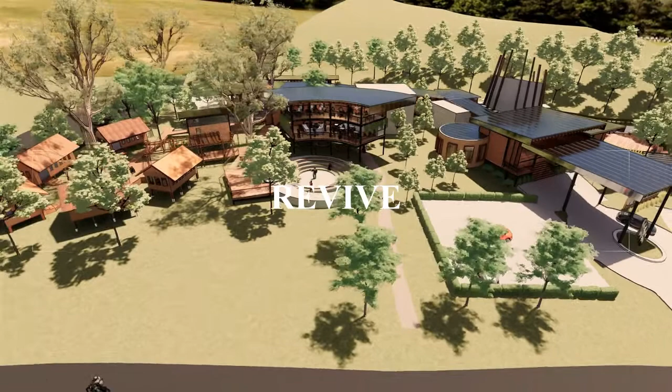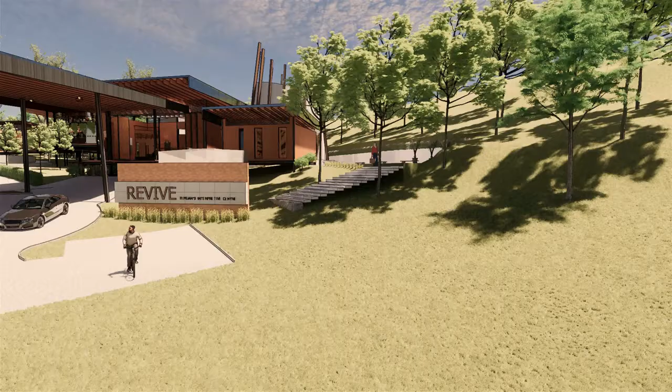I'm going to present my project 2.2, Interpretive Center for the Indigenous Temuan. Revive Temuan Interpretive Center is a center for the Temuan people and the society to visit and learn more about Temuan culture and embrace it.

As I searched about the Temuan people, I came across a Temuan contemporary artist named Shaq Koyok. He painted a lot of paintings that show and portray his own people, the Temuan tribes, expressing his emotion and message through his painting. My concept arose when I saw one of his paintings.

It was seen that a woman's face disappeared due to all the trees being cut down, but appeared when all the trees were still alive.

From his painting, I understand that the Temuan people greatly admire, appreciate, and are close to nature, as they can't live without it. The issue is that nowadays the Temuan people are forced to leave or move from their land and home, and all the trees at their place are cut down by developers, making them feel very frustrated. Temuan people were forced to live in the city or modern lifestyle, which makes them feel stressed, and some of them really miss living in the woods or jungles where they can be close to nature. Modern life is stressful for us city people too.

So in this project, I want to create a place where Temuan people and modern people can heal and revive themselves from the busy world in the city, just admiring the greenery and fresh air at this place. I want the Temuan people to embrace their culture and be proud of their lifestyle, and be happy living with nature.

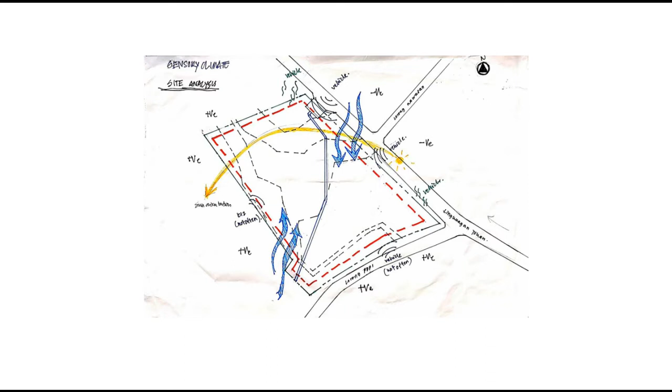This is the site analysis of the site. The positive view is towards the back, which is towards the greenery, and the front is the negative view. But from the road into the site, it's actually a positive view, so that can be used to attract people's attention.

These are some sketches of the site, and these are some pictures taken on the site.

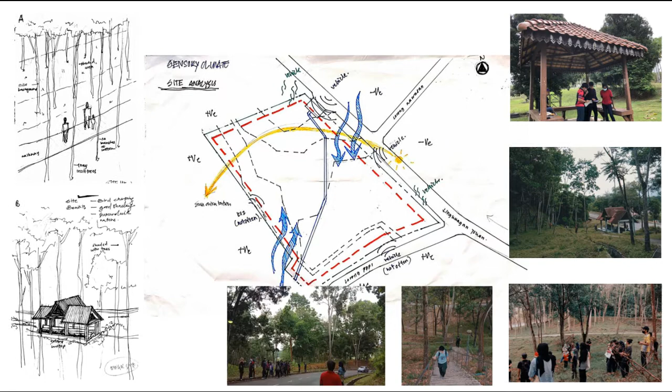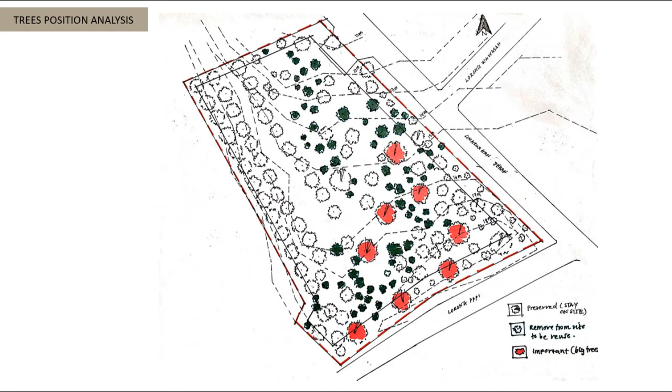For the design development, first I analyze the trees' positions on the site. I think about which trees can be preserved, which tree is important, and which tree I can remove from the site and reuse. There are a lot of important trees, the big trees on the site, colored in red, and some small trees can be considered to remove and reuse, while all the white-colored ones will stay on the site.

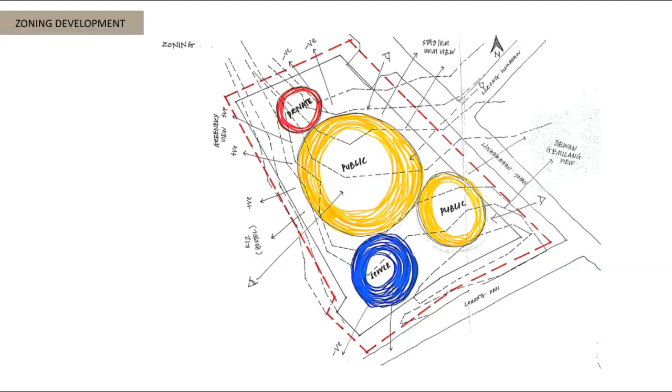By doing the tree analysis, I can do zoning for the site. The public space will be the hierarchy of the spaces and located at the front to attract people from the road. Next is the building placement based on the site.

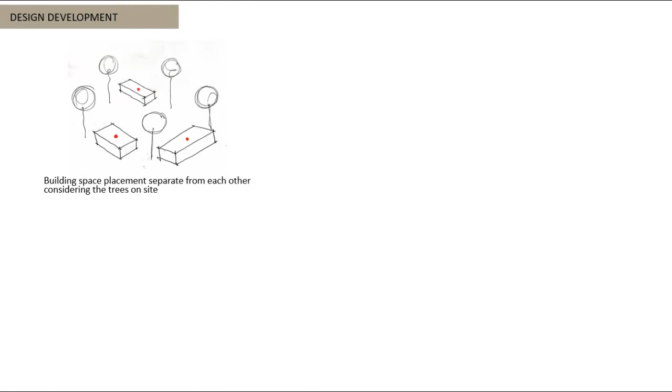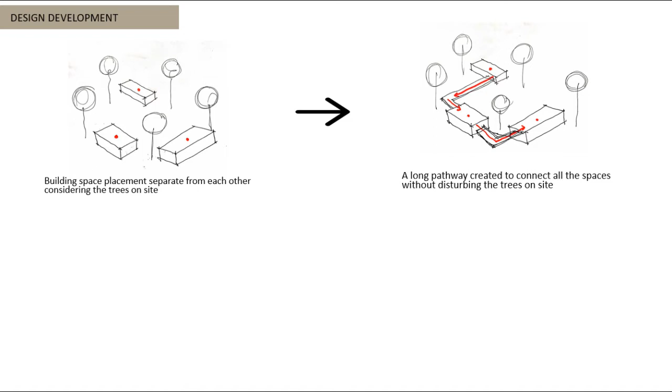First, the building space placements are separated from each other, considering the existing trees on site. Next, a long pathway is created to connect all the spaces without disturbing the existing trees on site. Next, the spaces are developed into more functional spaces for the user. Finally, all the spaces are connected with each other, developed and located in between the trees on site.

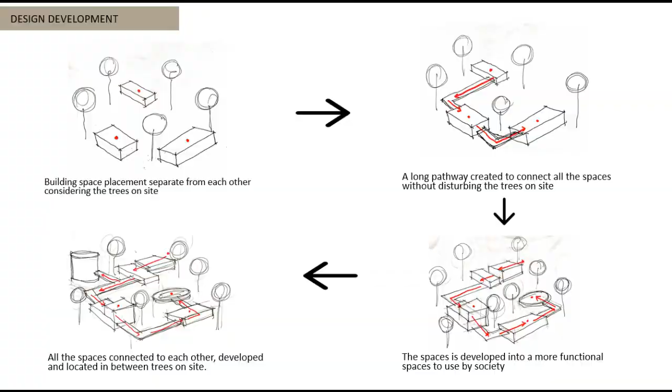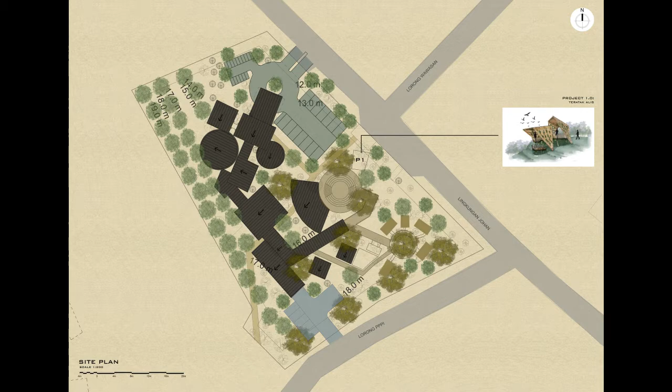The project one, which is Teratak Alis, will be located as shown in the picture, in front of the amphitheater, to attract passersby and pedestrians using the Lingkungan Johan road and Lorong Wawasan road. The loading and unloading area is located behind so that it will not be seen by people at the front.

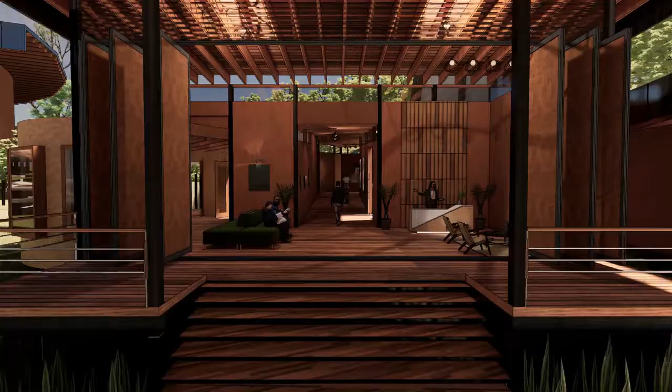From the drop-off, you will enter the lobby and reception. This is where people meet up and gather, and if there are any questions, they can ask the receptionist. This lobby is attached with a gift shop on the left, and on the right, separated with a pathway, leads you to the office or management room.

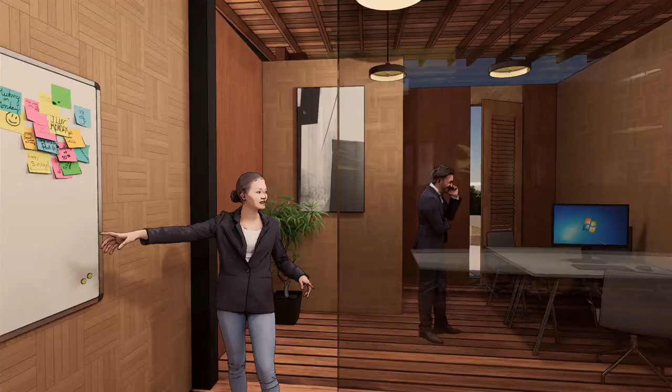This place is used for meetings and as workers' office.

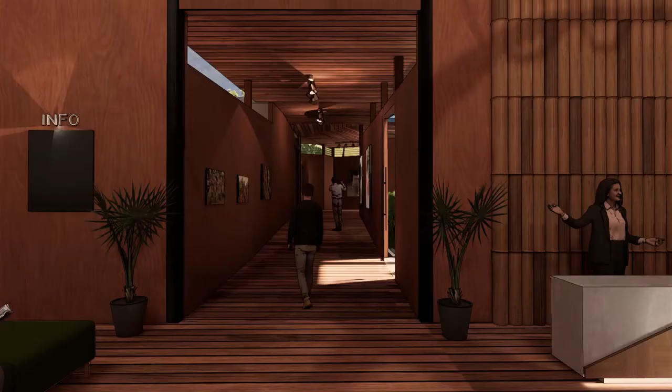Next, straight to the Temuan History Walkway. Before furthering the walkway, on the right is actually a pathway that leads to the multipurpose hall that can be used for any occasion. The reason the hallway is there is so people coming for an occasion don't need to walk all over the buildings.

They can just check in at the lobby and go straight to the hall. This hall also has a deck outside that can be used for any occasion or activity.

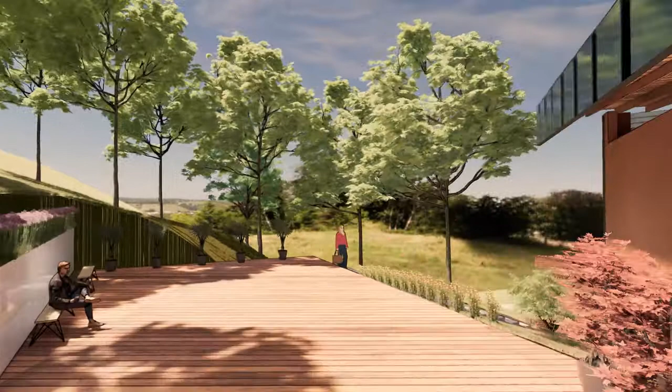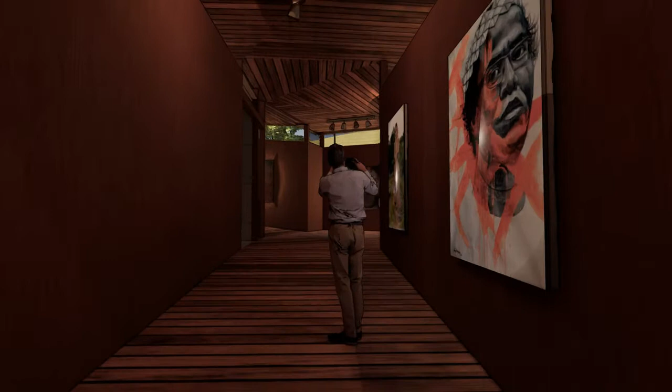Back to the walkway, first you will come across all the info about the Temuan people, their biography, origin, pictures and their story. Next, on the left, you will enter an AV room that will tell you everything about Temuan history.

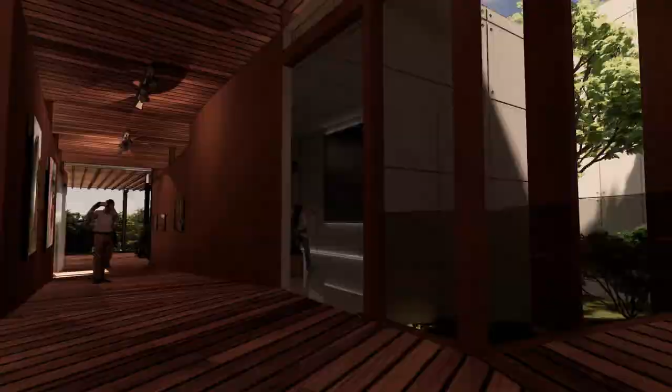Out from the AV room, you will find a lot of paintings done by the Temuan's contemporary artist, Shakoyo. This pathway is open to nature on the left, giving very good air ventilation.

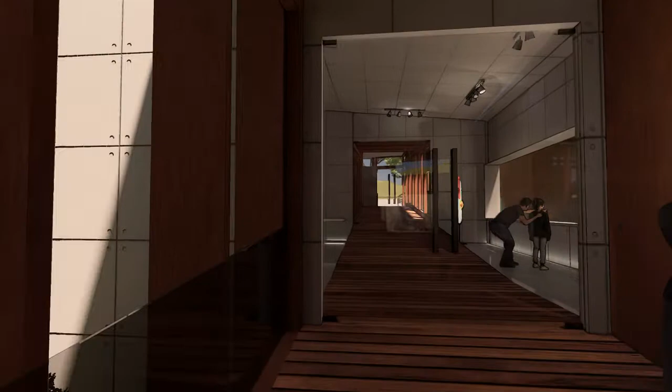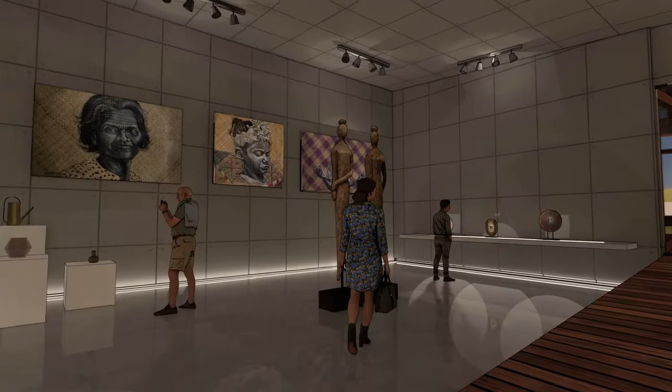Next, moving forward, you will enter the main gallery. This gallery showcases the Temuan's important artifacts such as pottery, weapons, jewelry, utensils, their clothes and many more.

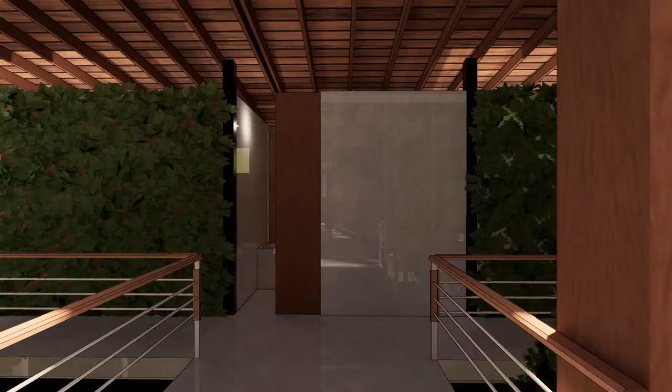Out from the gallery, a pathway leads you to the toilet and janitor on the right. The toilet is separated from the main walkway with some greenery to allow good ventilation, and specifically to keep bad smell from the toilet a little far away from the main space. Beside the toilet is the loading bay and M&E room.

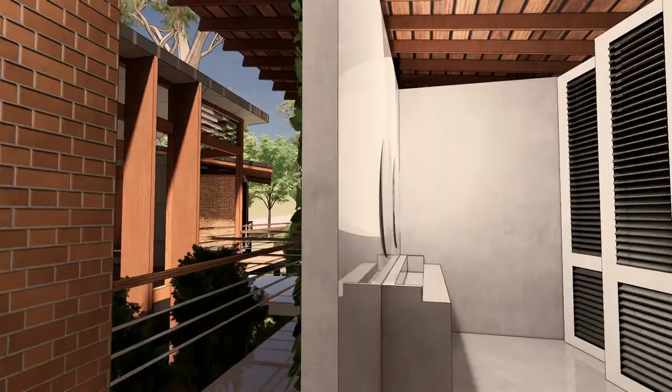This loading bay has a 3-point turn for vehicles to easily park for loading and unloading things.

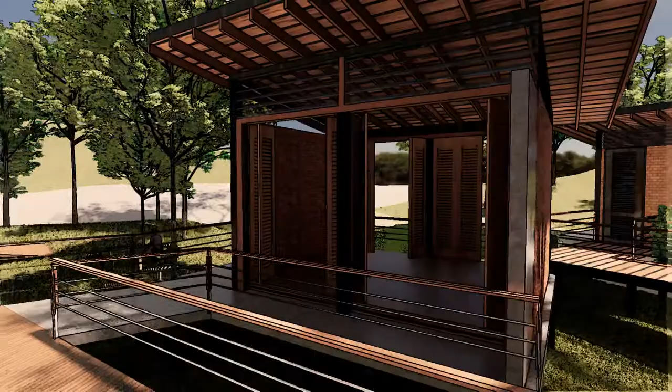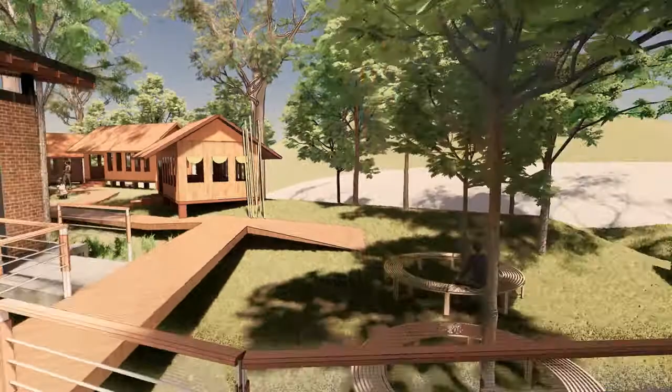Next, on the right there are pathways leading to the surau. Male surau on the right and female surau on the left. The male surau was designed to be open concept, using flipped doors that make the space open with good air ventilation and lighting, while the female surau is designed to be more closed or intimate.

The female surau has a green wall inside to give good privacy, plus good ventilation and lighting. Outside, this surau pathway can actually lead you to the Temuan Village at the front.

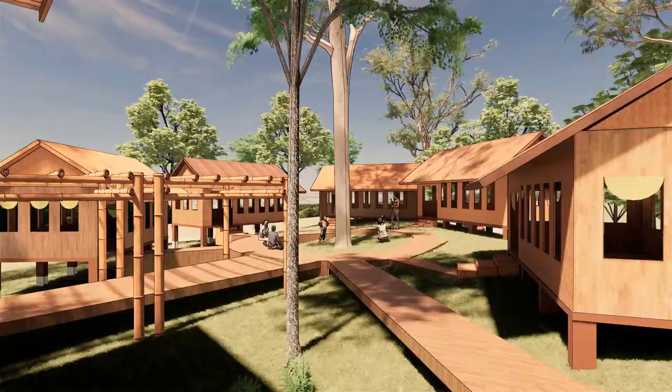Back to the main walkway, on the left you will find the revived cafe and library. This cafe has 2 floors, ground floor for the cafe and upper floor for the casual library plus cafe.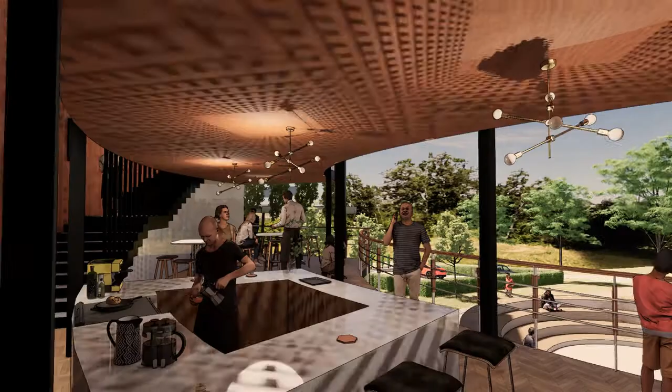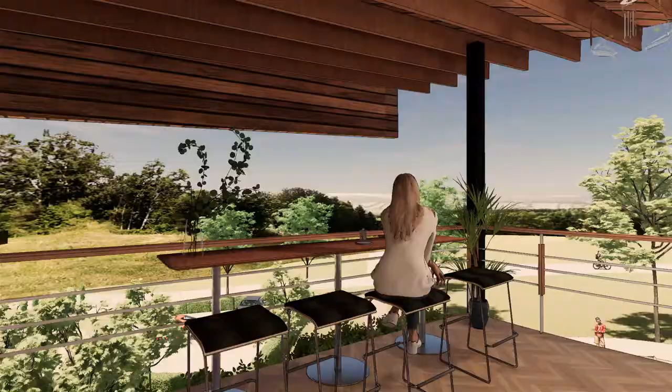This cafe is designed overlooking the amphitheater at the front, so that people at the cafe can watch performances held there from time to time. This cafe is designed to be open so that people can interact with each other freely.

Next, after the cafe, when you walk further, you will find the Temuan Village. This village offers hands-on experience of the Temuan lifestyle and activities.

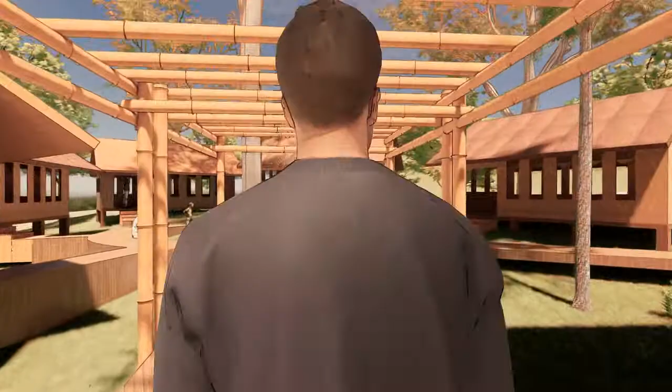Here, you will learn with the Temuan people how to create their handicraft, and learn how to sumpit, which is their weapon used to hunt animals in the jungle. You will also learn how to dance the Tarian Sewang, their ancient dance.

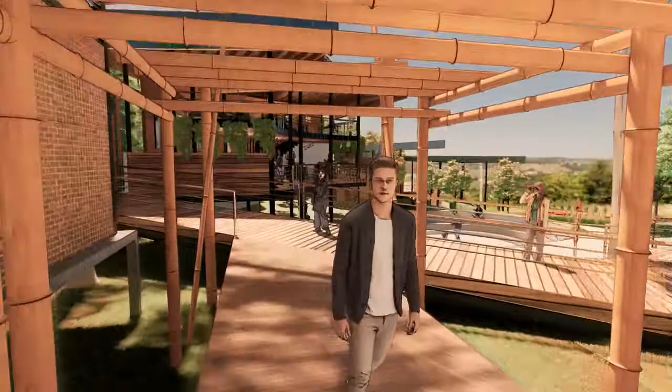You can also buy their handmade handicraft. You can also visit the Temuan's house and see their actual lifestyle, and watch the way they do gardening and plant their herbs too.

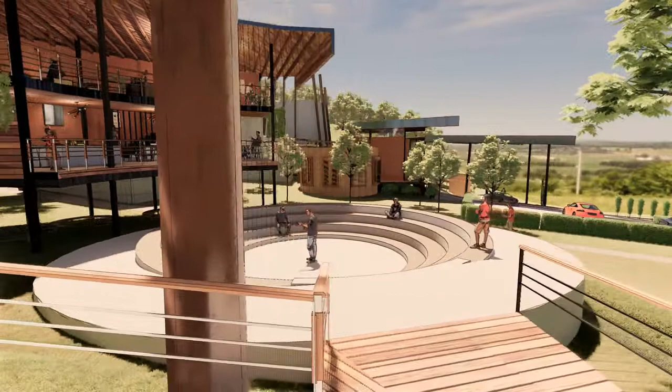Out from the Temuan village, you will end up at the amphitheater. This amphitheater will be used for performances, gatherings or any activities, and will be located at the front of this building to catch the attention of passersby.

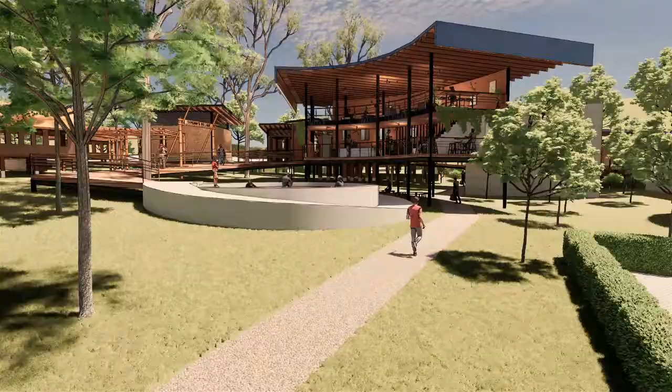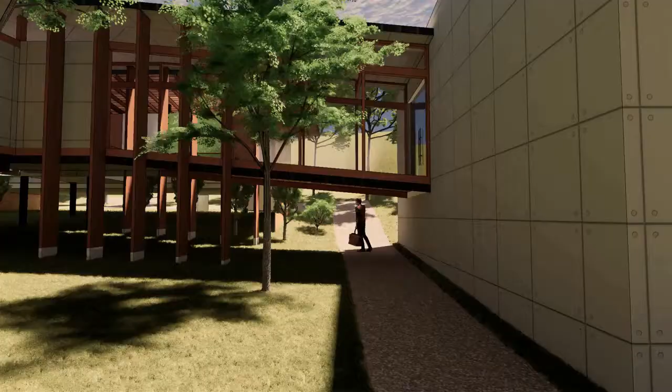I mostly used concrete for the main gallery and the abbey room to show the strength of the Temuan history, while the lobby and other spaces use timber as the main material to have a very good thermal temperature in the space.

This is the interior perspective pictures. This is the exterior perspective pictures.